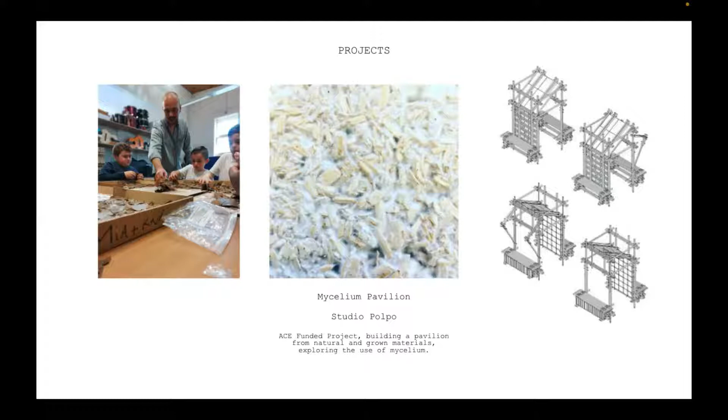Next slide, I'll skip through some of these. This is a project with the archetype, looking at introducing the idea of using sustainable or reused materials and making things with them, or making the structure. A lot of feeling, touching, playing with materials, and creating some kind of playful structure, introducing the kind of principles behind that which we use in our own practice as well.

Next slide, I'll skim past this a little - this is some of the other more conventional architecture work we do. A retrofit and extension of a house in an area called Nether Edge here in Sheffield. During the pandemic we were looking at redesigning spaces to be generally healthier, prompted by COVID. This was for a local co-working social enterprise in the city.

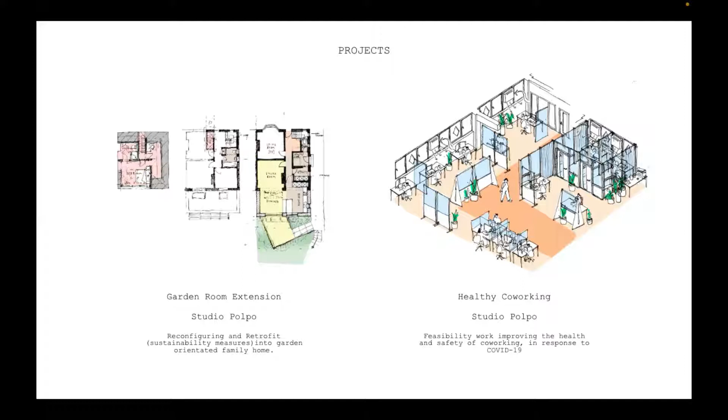So this is an ongoing project, and I just want to include this to show that it kind of leads on to other things, and it sits in the background and comes back. So those conversations with Louis around using this with the National Food Service, and thinking about what...

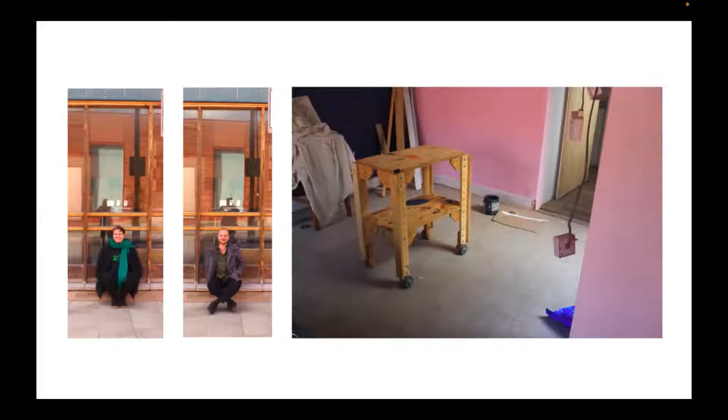Because it somewhat embodies similar principles, thinking about how that might come about. And some conversations with Sally Laverne, who's an artist we work with on this project, about creating a hay oven, and how that could be used across networks like the National Food Service. But that was just a very initial discussion the other day.

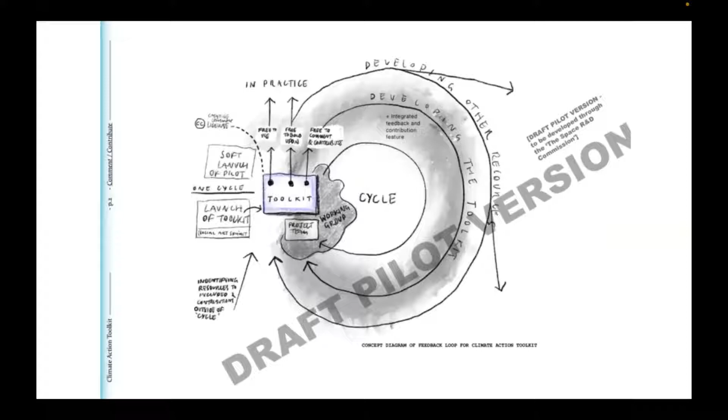So now I'll just talk a little bit about future neighbourhoods.

Future Burngrave explores community-led retrofit by the activist community of Burngrave. Through common ownership of their homes, the project demonstrates neighbourhood-scale retrofit as an opportunity to add value to communities through social and technological infrastructure to live sustainably and affordably.

Future Burngrave emerged from the spirit of our design studio, Studio Build Design, which was led by Lex Drake, who works with practical practice architecture. It had a live focus, and it considered participation in building, placemaking, and how it might empower communities.

This is quite a cool illustration that I think sort of just encapsulates a lot of these frustrating moments trying to articulate why we should do some of these things.

It was born out of the motivation to address the climate emergency, to consider decarbonising homes as an opportunity to address far more than just building performance, which is quite a prevailing narrative within retrofitting and sustainable homes. Quite often the conversation comes back to technology, when actually I think a lot of the issues aren't technological, or the solutions aren't technological, they're social and about our perspective of the environment and our world and our relationship to it generally.

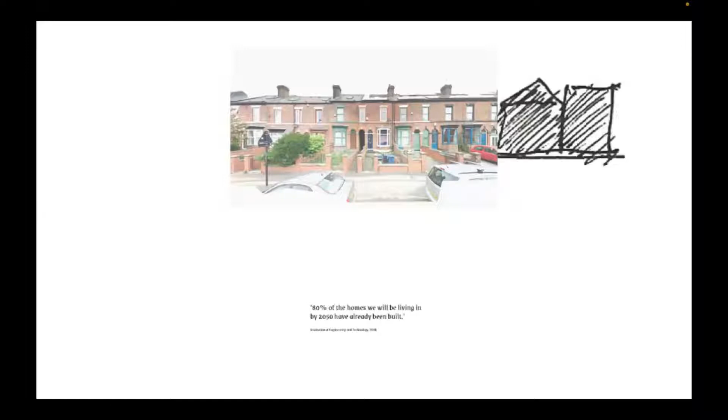Retrofit is the addition of new fabric, components and systems to improve performance and useful lifespan of buildings.

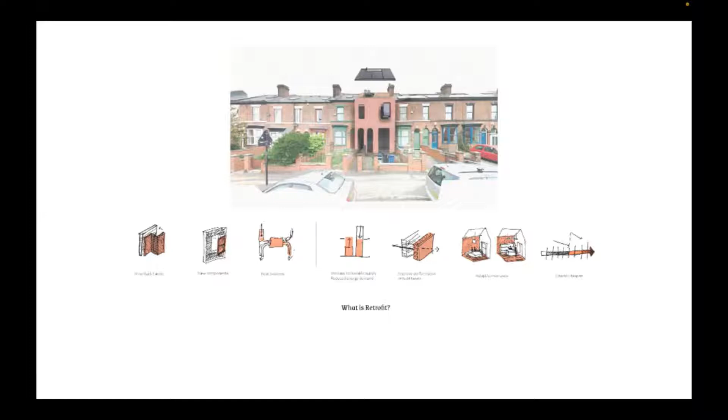The situation is significant in scale and urgency. We must retrofit 29 million homes.

However, the majority of UK housing stock has fragmented ownership, with owner-occupiers accounting for 64% of homes in the UK. This is not the only crisis relating to our homes either.

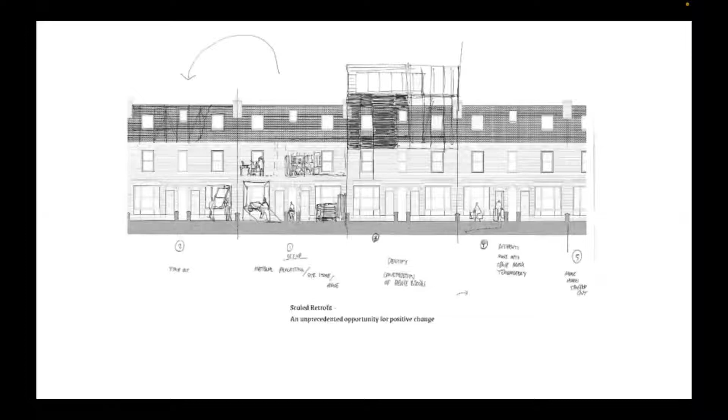There's a housing crisis of accessibility and affordability, and the consequences of austerity as well, including the lack of local social infrastructure required for these communities. However, scale of retrofit can be an unprecedented opportunity for positive change.

So this is Future Burngrave, and this is realising some of these propositions through an architectural proposition itself. Future Burngrave proposes an approach to respond to these issues, and I'll talk about this now through the idea of scale, social infrastructure, affordability and accessibility, and the response to the climate emergency.

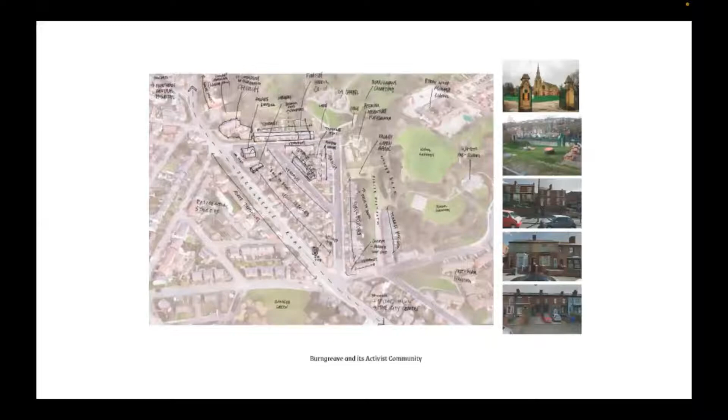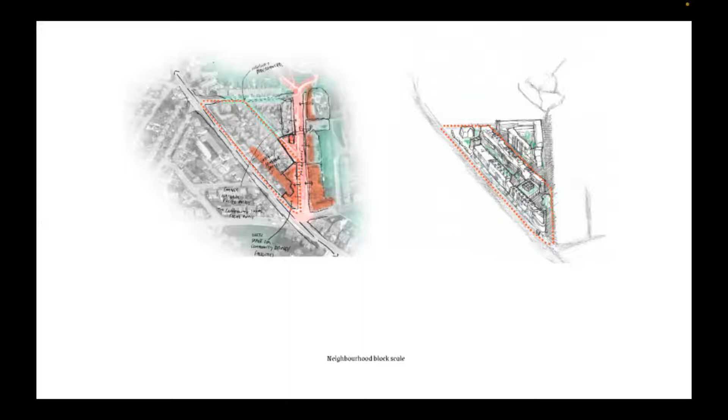So the project explores the neighbourhood block scale rather than retrofitting individual homes. Scaling up is appropriate to the challenge, and it provides critical mass for new communities.

But it's small enough to maintain a cohesive intentional community. So the neighbourhood block scale is comparable to other co-living communities, but could be scaled further through more community organising at the neighbourhood block scale.

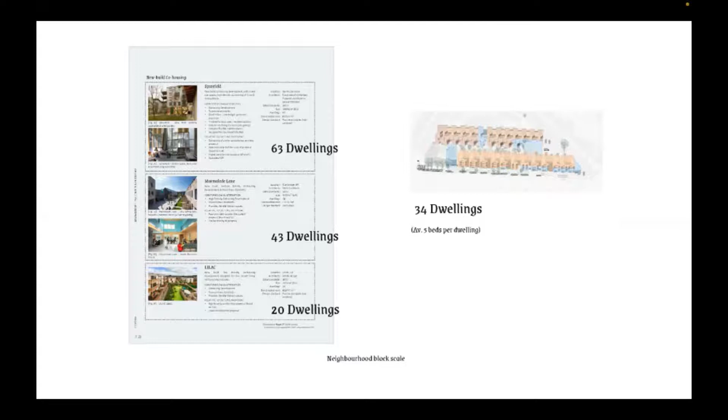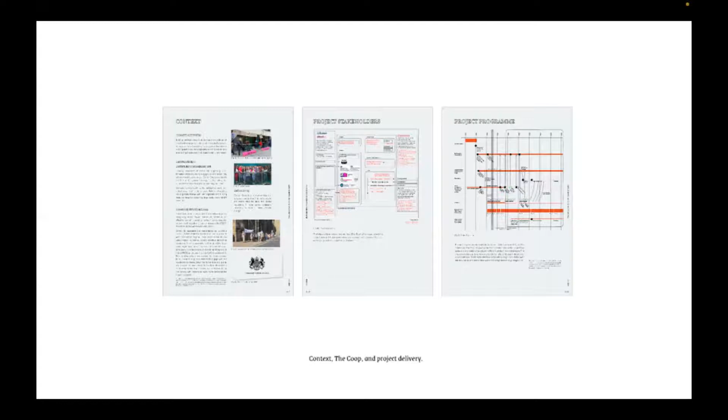So this is some of the nuts and bolts of this. As maybe gathered at this point, the language here is very much along the lines of a kind of super project. So we're now delving into a bit of a report around the project. I think with this project in particular, this underpins a lot of the architectural propositions that were made. I think it has particular relevance to the kind of work we're doing as well, so I'll go into some of these extracts now.

So, neighbourhood retrofit would be extremely difficult to deliver without legislation which encourages it. This scenario suggests that we would need increased political will for green policy and funding.

Community energy, housing and development cooperatives akin to Carbon Co-op would play a role in both building community support for such policies, and serve as effective organisations for delivering these changes on the ground. This project speculates a Community Retrofit Act 2021 - we're now in 2022 - which provides a mechanism for communities to express consensus for neighbourhood retrofit and serve statutory orders necessary to establish community ownership of the collection of homes.

As part of this act, local councils would be required to commission sustainable street master plans, identifying committed changes to adopt highways in response to a shift away from car-orientated streets, with small pedestrian focused streetscapes, future sustainable transport infrastructure, sustainable drainage and greening streets.

So the community are represented by the Future Burngreave Development Cooperative, advised by the services of the Neighbourhood Retrofit Service, with the project team appointed from the Neighbourhood Retrofit Services framework through consultants and contractors.

That's right. The Neighbourhood Retrofit Service is effectively a one-stop shop for retrofit consultancy and project management services for homeowners and community-led organisations. It is incorporated as a community interest company and underwritten by the government.

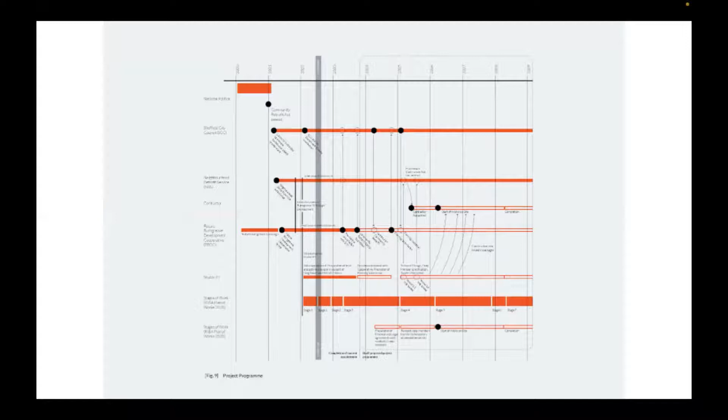So I'll skim over this a little bit, but in short, it's estimated that such a project would cost between 20 to 35 million at the scale we're proposing. Just for comparison, the last big chunk of funding supporting communities to decarbonise, the new Green Deal, was only 20 million, and that was for a number of projects, not just a single one. So we're so behind on this area.

Coming back down to the more architectural aspects of the proposal, it responds to the common typologies and urban conditions, allowing the approach to be relevant to neighbourhoods throughout the UK. So looking at how this is something that can be scalable.

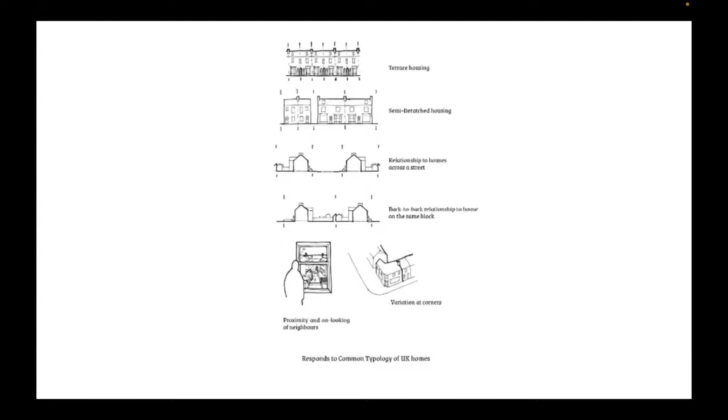So the site in Burngreave exhibits many of the characteristics. It has old masonry homes, car-orientated streets, a fragmented ownership of the space, and this is a very typical northern urban condition, really.

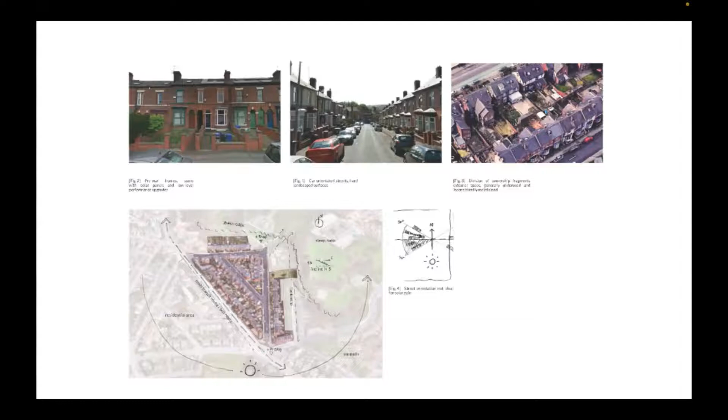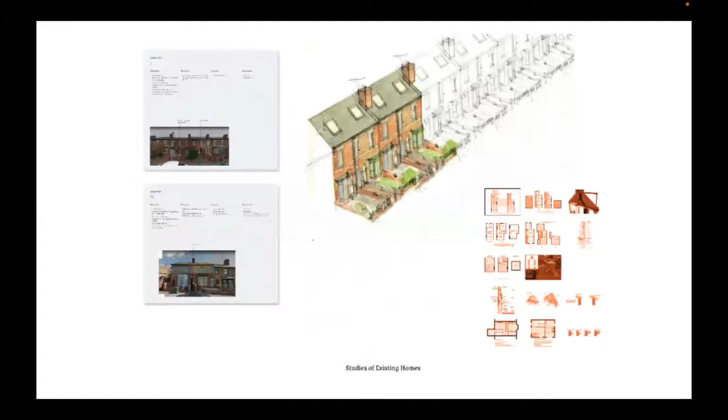So these typologies were studied in depth to inform the proposal. Through transitions from multiple private ownerships to a single mutual ownership by the cooperative of residents, works to the neighbourhood can be significant in scale, allowing for substantial reconfiguration of spaces, uses and boundaries.

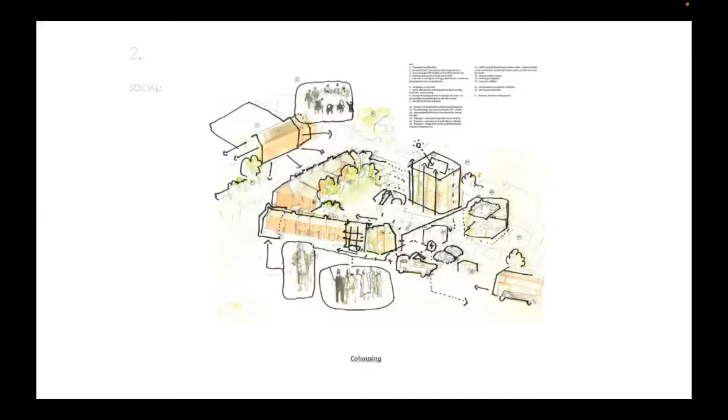Social: the project proposes a co-housing model, which is an intentional community with a socially connected and supportive lifestyle. The community lives in a balance of common and private spaces, such as self-contained homes with shared living spaces, gardens and other amenities.

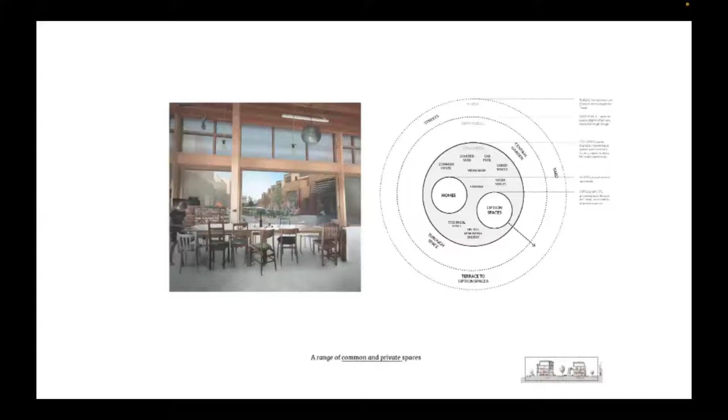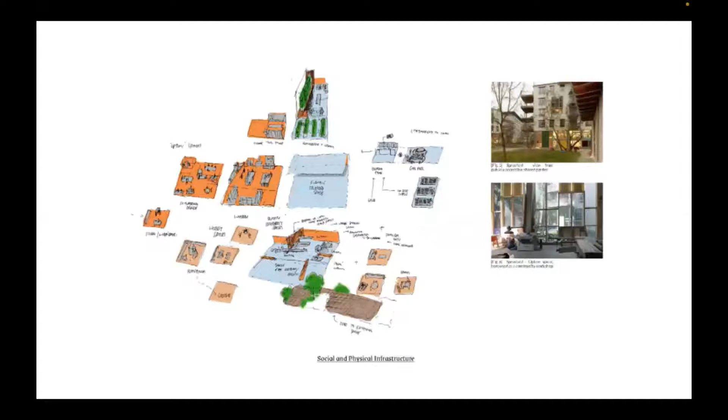The new amenities are designed for the lifestyle future, such as transitioning to circular economy principles, workshops for making, repair and upcycling, shared stores for reduced individual ownership and consumption of tools and goods. This social and physical infrastructure provided locally allows for low impact living.

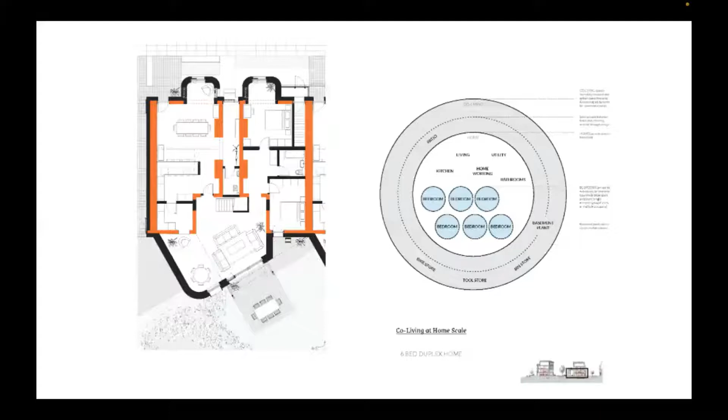Different levels of co-living are also manifested in the house types. These range from conventional 3-bed homes, to larger 6-bed homes for shared households or larger families, to 8 to 12-bed cluster homes.

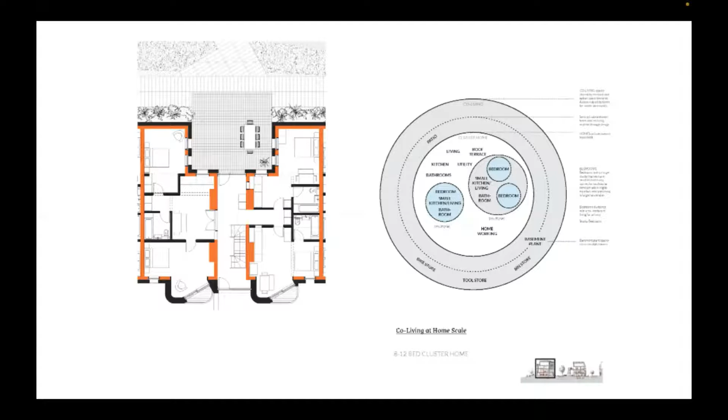These provide compact living, cooking and eating spaces with semi-contained units of 1 to 2 bedrooms, with a large shared kitchen living space for households. By accommodating compact kitchen and living spaces within private spaces, it allows for a cohesive social environment within larger households. So, affordability and accessibility.

Mutual ownership: mutual home ownership provides an effective model for affordable housing in perpetuity, and is more accessible to lower and insecure income households. This model has been pioneered by Lilac.

The project provides roughly 40% additional area of accommodation. This increases the number of homes and potential income for the co-op. The critical mass, this kind of scale, provides a critical mass for communities. The land value is less proportionally per square metre of floor space, but additionally, a densification of the existing urban sites preserves the environment and ecosystem elsewhere.

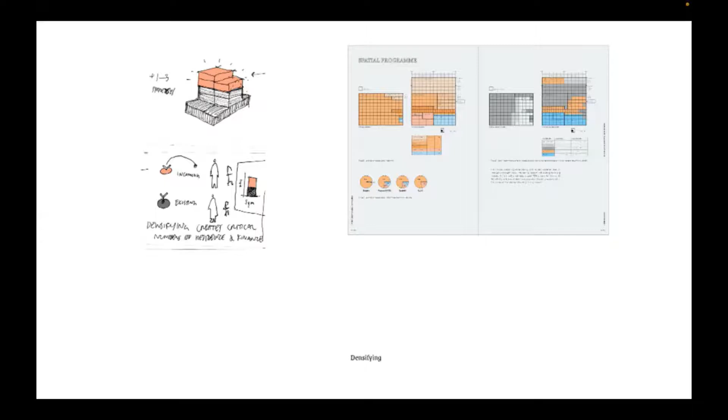So, options: option spaces. By densifying, it allows possibly to open up other spaces for new uses. These are flexible spaces which could be community or commercially used, so they could either be used to address the needs of the community of this development, of the wider community, or it could be used as a source of income.

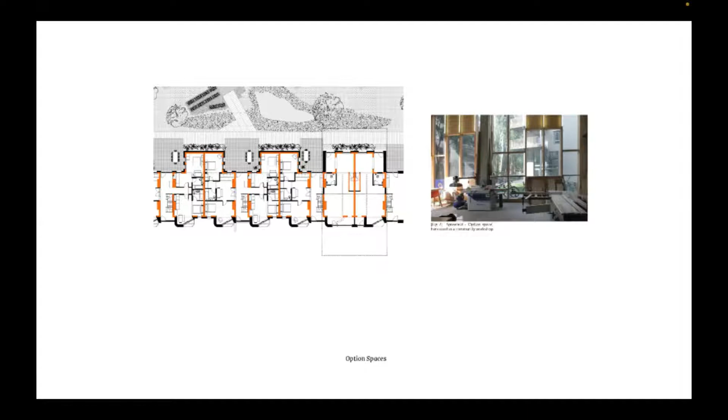Next, response to the climate emergency. This will explain some of the more architectural moves to that effect. There's value in the existing fabric and extending its useful lifespan. External retrofitting will achieve the best performance upgrades in building envelopes, both for climate change mitigation and adaptation. This makes significant changes to the external character of our neighbourhoods, though entirely appropriate in proportion to the scale of action necessary. This also shows that these homes can still be beautiful as well.

While internal retrofit approaches can be considered, demonstrating that retrofit can be an opportunity to enhance neighbourhoods is key to making a strong case for scale of retrofit. External retrofit takes up the size and character of spaces internally, and we also get a glimpse of formerly external brickwork inside.

It employs principles with the intent of going beyond net zero in the context of the Zero Carbon Britain scenario. This is in reference to the Centre for Alternative Technology report, of the same name.

It has on-site renewables for clean energy and supply resilience, with technical space on site for plant, allowing for energy storage management systems not normally available or affordable for small developments, as well as a small electric car pool.

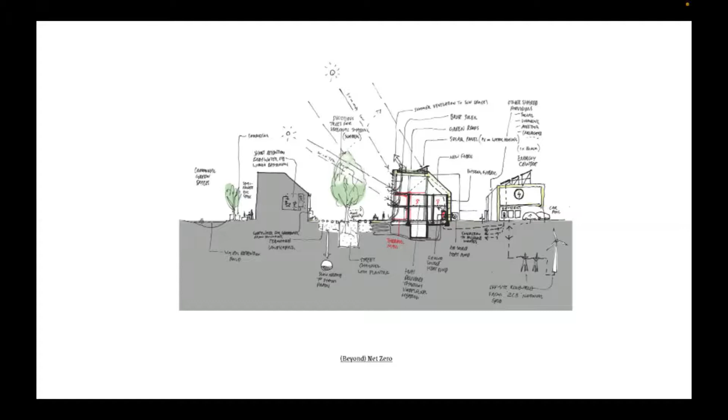It also uses low impact materials, favouring those that can sequester carbon and reduce the upfront impacts of building emissions. Key materials used in the project are wood fibre insulation products, laminated wood beams for high performance structure as an alternative to steel, and recycled glass foam aggregate for structure below ground.

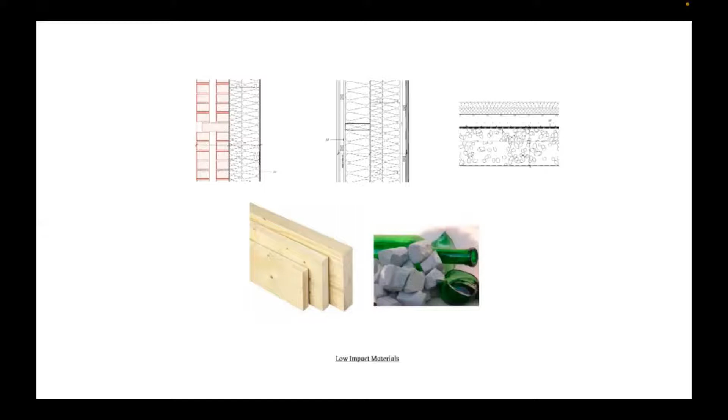Site strategy: the project reinterprets the existing back-to-backs. Densifying the rows allows for additional new programme. The south row consists of larger cluster homes with stacked duplexes, with deck access to the north row.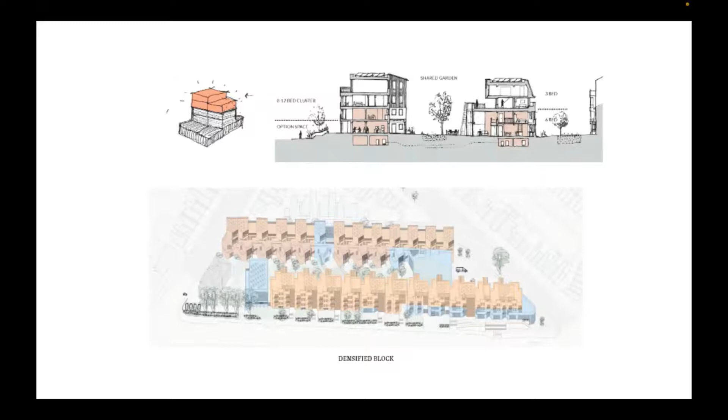These enclosed and shared gardens provide a place for relaxing, meeting, playing, and growing. The majority of homes are accessed off the street at ground floor, with the remainder from the deck. All ground floor homes have direct access onto the garden via patios.

The blocks deviate at the ends, with a yard and a covered space to the east and a technical space to the west.

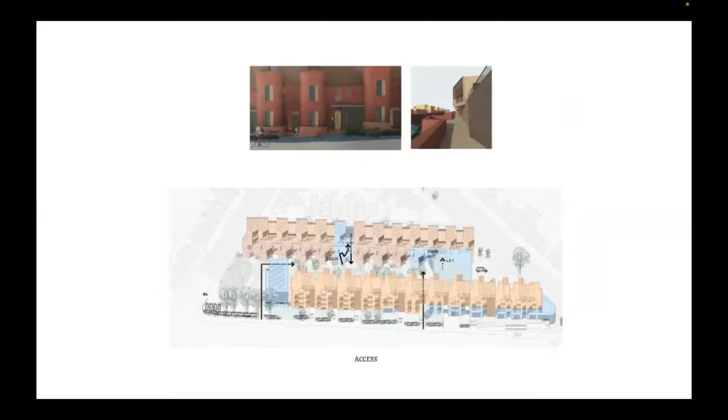This shows a through house, which is a break in the block for access to the garden, as well as the refuse store, community rooms, and drain.

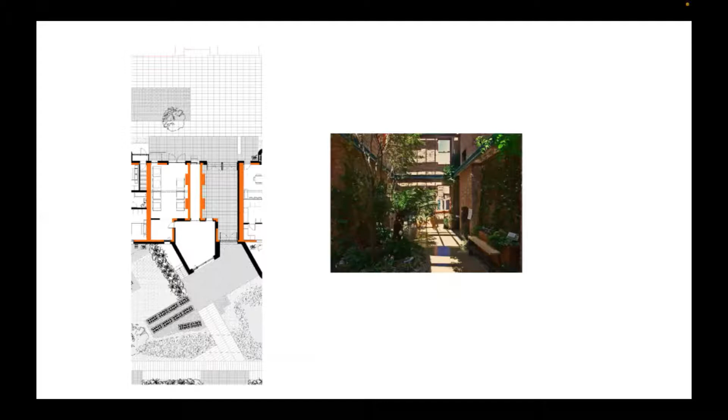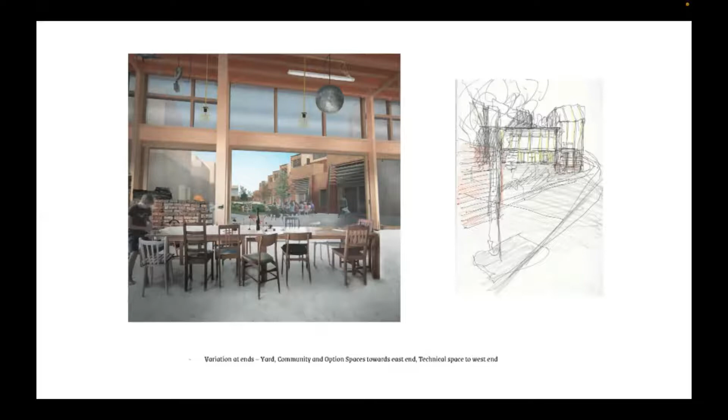Here the covered yard to the east is shown. This acts as a flexible space for the community, which can serve either the workshop to the left of the view or the common house to the right of the view, as well as the garden and the yard adjacent.

The technical space to the west houses plant energy storage alongside a large pipe store, with a lightweight polycarbonate pavilion above for use by the community.

Building resolution looks at the planning of the houses themselves, specifically resolution for homes.

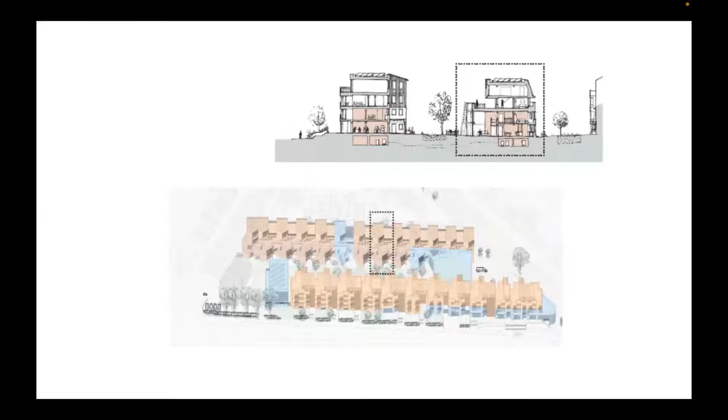The existing homes, built in units of two, have been combined in order to add generous new spaces: living spaces on the ground floor with access onto the street and garden, and bedrooms on the first floor. The new double height living space, orientated to the south, creates a feature of the existing formerly external wall, which acts as a thermal battery for the house.

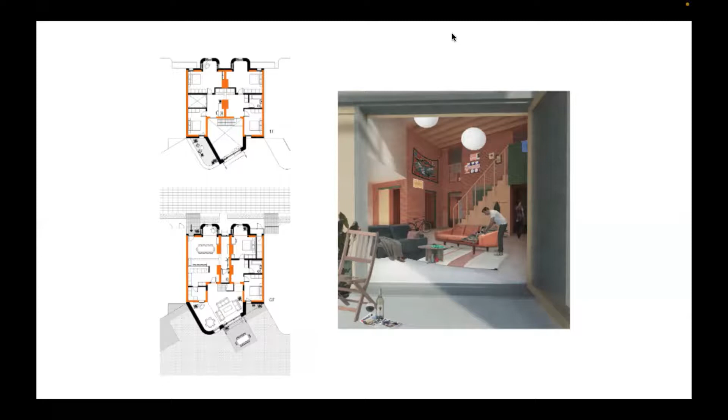The 3-bed home above has bedrooms below and a living space above, making use of the uninterrupted south-facing aspect.

The home fabric components and systems are designed to passive principles, detailed further in the report.

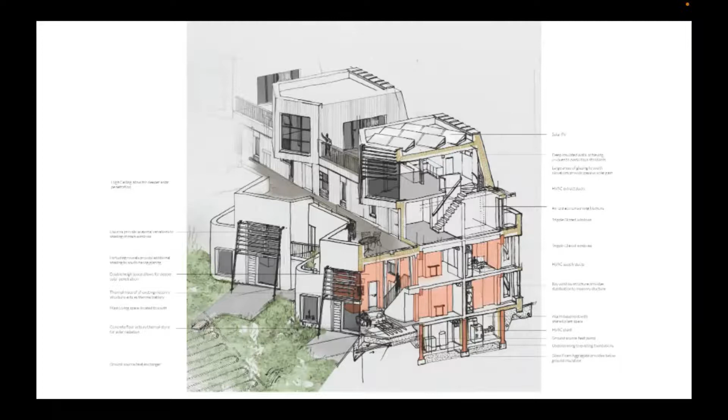This covers the structural strategy and how it's realised. The material of the existing building is initially audited. The existing masonry is retained, however the majority of the existing timber is removed.

While this is not always necessary, additional structural demand from the new storey requires timber elements to perform to a higher level than existing. These are removed and processed on site in the covered yard. Many of these materials can be reused for landscape: plain bricks are used as paving surfaces, slates used as tiling.

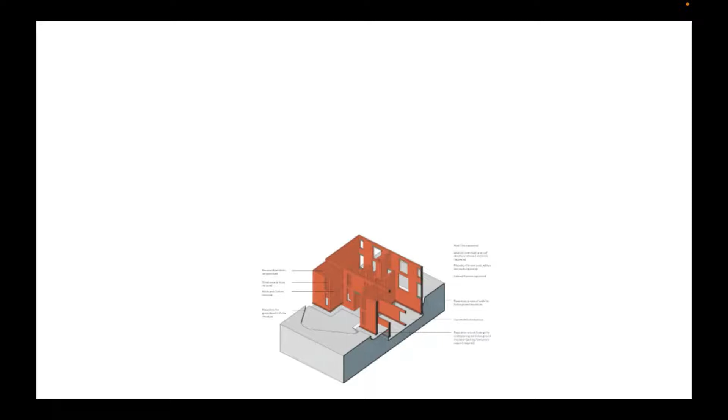This shows a bit of the material palette, used in the kitchen and other areas, such as roof slates.

To give some context, I know it's slightly out of order, but what I'm showing is a more heavy-handed approach to retrofitting, taking maybe slightly more out, because on site it's responding to some of the worst case scenarios. There's also a lot of people who say, well, why can't you do that less invasively? So this is partly to address those arguments - you can typically do it without taking so much out.

But actually, even if you do, across a large number of buildings, you can still take slightly more out and still achieve the goal.

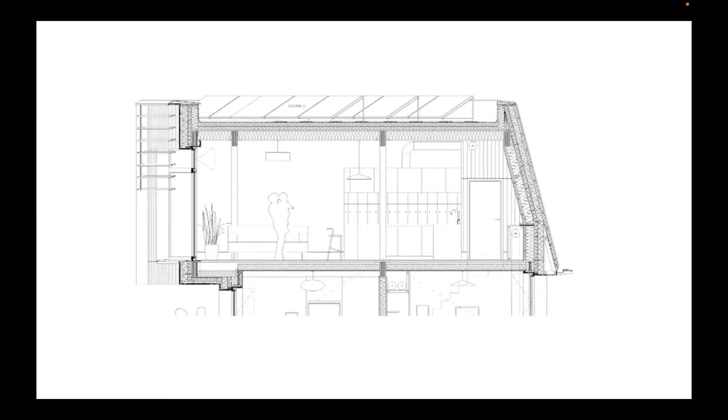A new timber platform frame is added, with LVL beams for lintels and longer spans. Allowance for additional structure is considered in design, subject to the condition of the original frame from the survey.

Reinterpretation of the bay windows is designed to improve the stability of the structure.

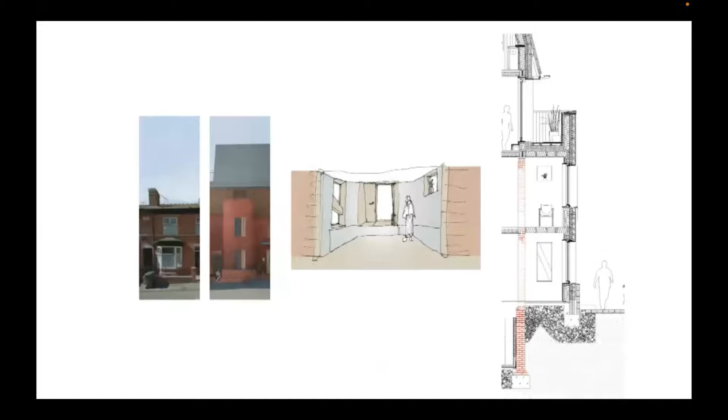The construction build-ups of the scheme have been studied in detail as well, designed to achieve a U value below 0.15, which achieves Passivhaus standards.

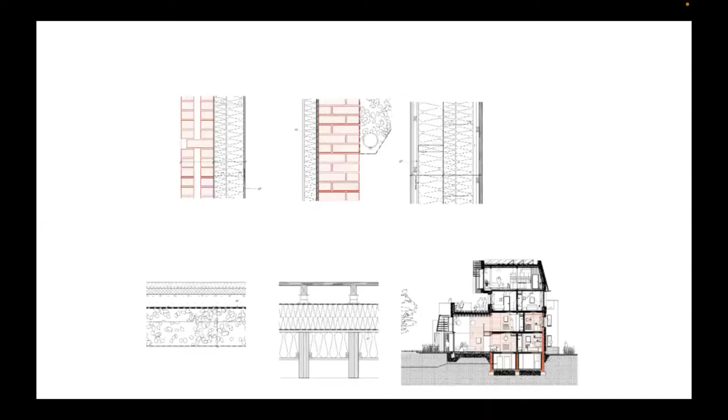Just a bit of a light zoom in. The south facing windows are fitted with adjustable louvers to respond to climate change. As the climate changes, it's important we have measures that can adjust to the realities of climate change.

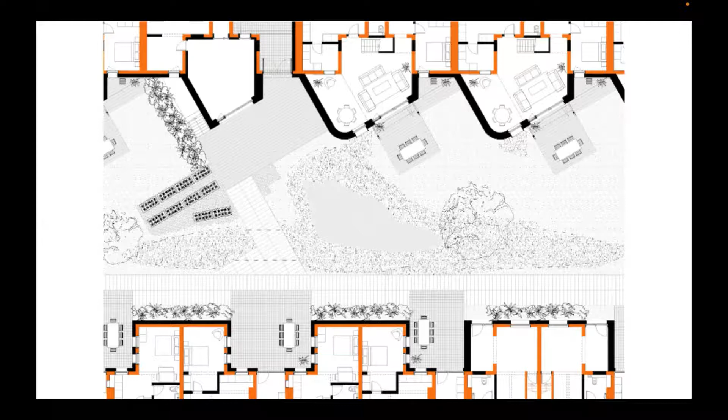Water retention features, most visibly the water retention pond in the shared garden, mitigate the effects of extreme weather events as well. I think that's it for the project. I'll just introduce a couple of things that come after this as well, which could relate.

So what next? I've been working with Christina Cerulli, who's one of my colleagues at Studio Polpo, continuing research around retrofit, but looking at the community-led and social implications of that, and challenging a lot of that technical focus narrative.

I'm also working with Studio Polpo in bringing the Sheffield Community Land Trust back to life. That's the project I'm working on, and we're looking at how we apply a future neighbourhood approach to this.

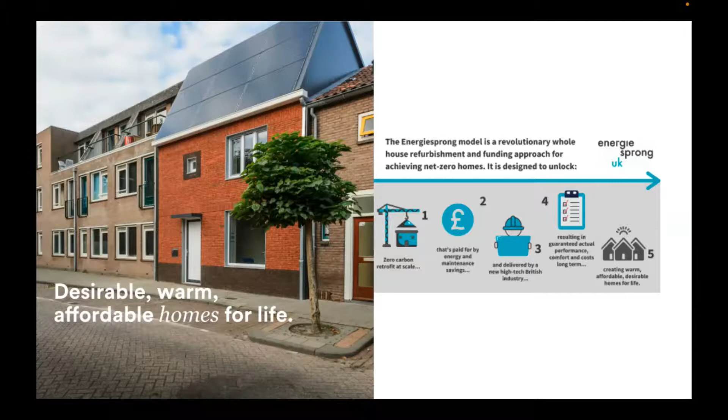I was part of a hackathon, and I was in a group of people looking at how you build the desirability of retrofit, particularly looking at how you give Rightmove, which is obviously one of the larger platforms like this, the retrofit makeover.

I won't go into this in too much detail, but it's about making retrofit more appealing, getting trigger points such as when people move homes, connecting with other retrofitters, and trying to sneak in—it's very commercial focused—but how do you change that to be more appropriate for community-focused people, and involve perception of what is a good location as well.

That's me done. So I suppose, just any questions really.